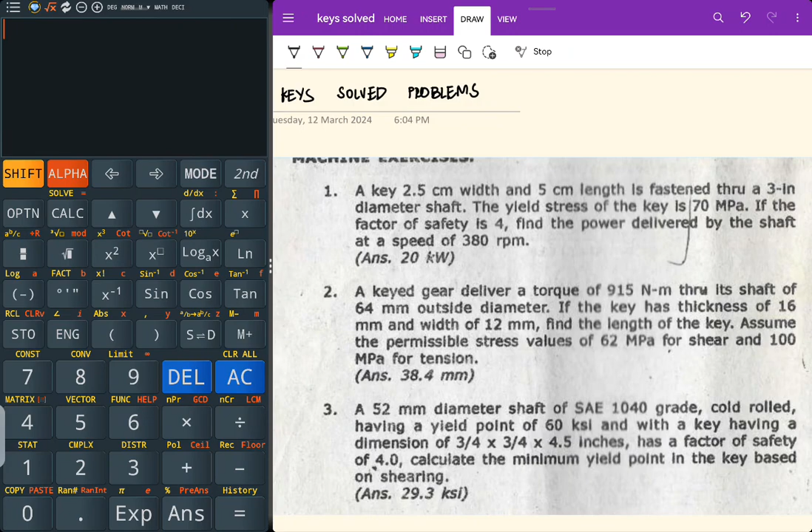Okay, discussion. I put in a part there where it's easier to figure out the compressive strength and shearing stress on the key. But always take note, as I taught, that the torque between the shafting, the key, and the coupling are always equal. So let us go with these three problems.

For problem number 1: a key, 2.5 cm in width and 5 cm in length, is fastened through a 3-inch diameter shaft. The yield stress - when you're given the yield stress of a certain material, there is a standard of the design, which I will include later. But take note, the stress of the design is equal to 0.6 times the yield given to you, divided by the factor of safety. Take note of that, based on the design of keys.

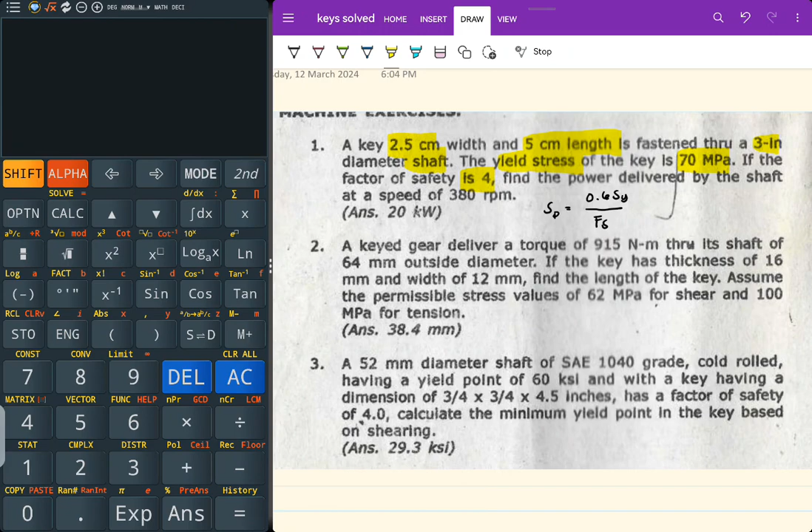Now, when it's said that the key and shaft are of the same material, that means their yield strength is also equal, and the same factor of safety applies to them. So let us continue. You have here a yield stress for the key that is equal to 70 MPa. Now, if the factor of safety given is 4, find the power delivered by the shaft at a speed of 380 RPM. That's basic.

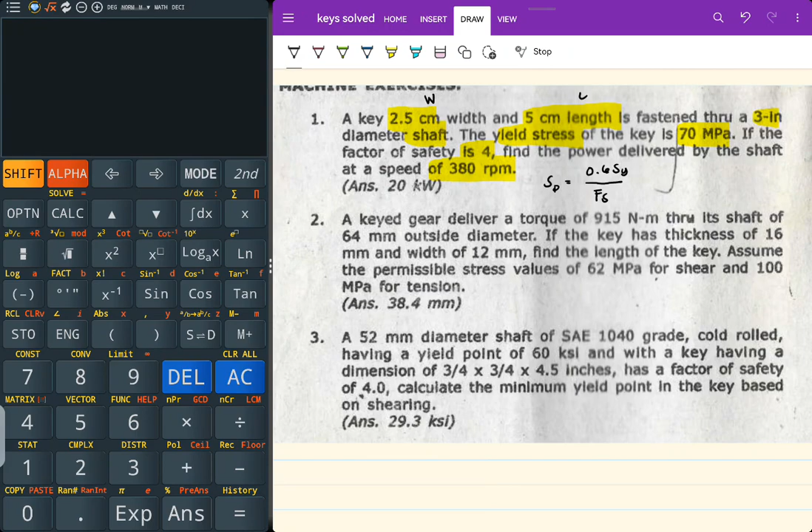What's given to you is the yield stress on the key. So you have the width of the key, which is W, and then the length. Was it said if that is a square key or rectangular key? No, it wasn't given. So let us assume nothing was given. So what do you need to find now? The power on the shaft. Take note, what is the power of the shaft?

Number 1: Power of the shaft is equal to TN divided by your factor. This power, we don't know. We also don't have the torque. We have N. This factor, definitely, we know that.

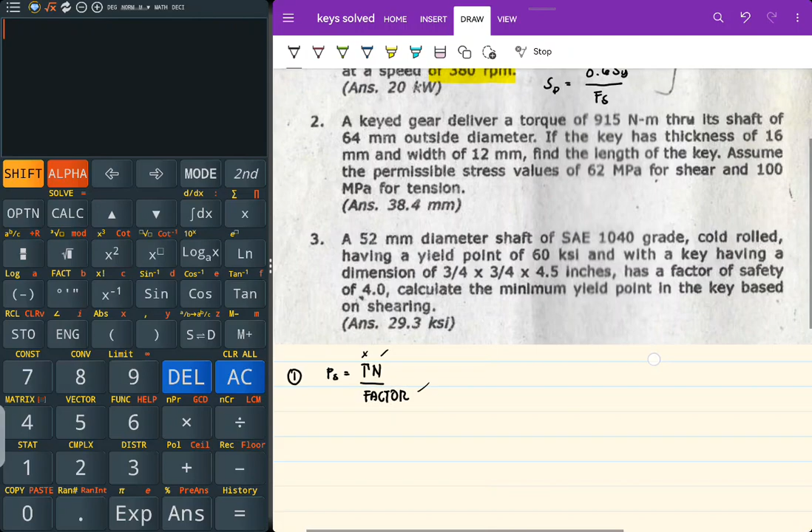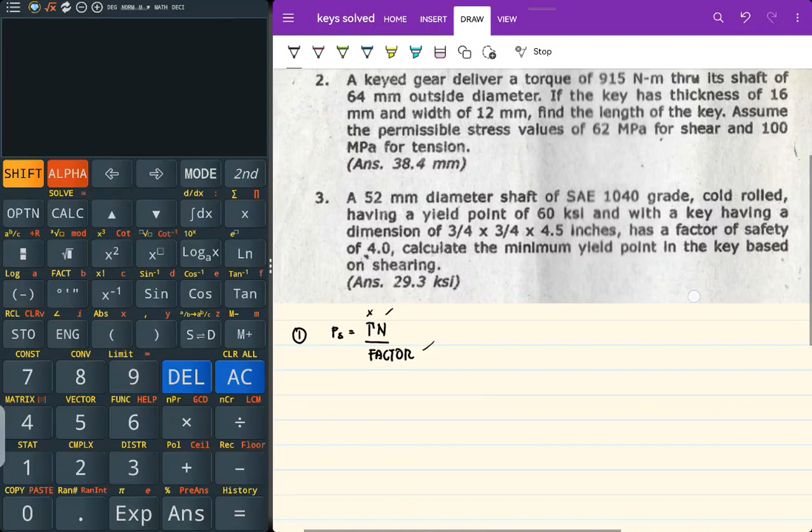We have memorized that. So what we'll do is find the parameters from the 70 MPa yield stress on the key. Sir, what is the design stress of the key based on shearing? I don't remember, sir. Take note that the torque on the shaft is equal to the torque on the key, and that is also equal to the torque transmitted by the coupling. Remember this because our next discussions will be all about couplings.

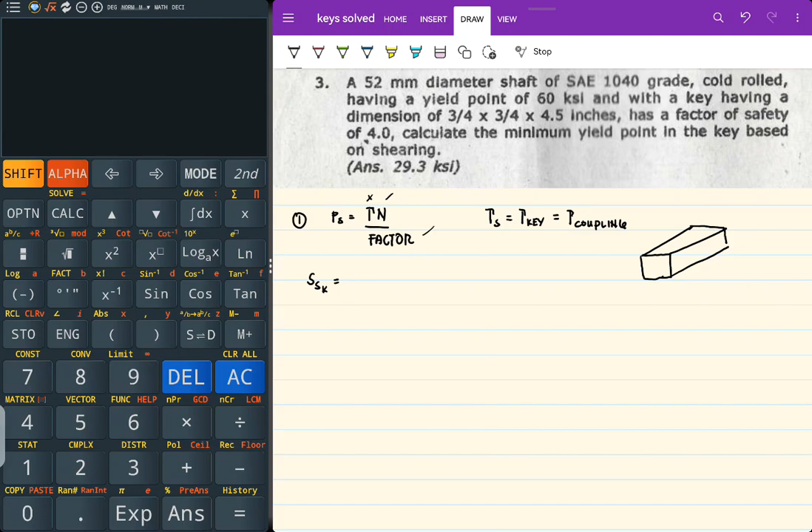If you will see our cross-sectional area, it is this one. This one is the cross-sectional area of the key. This is the shear area. So what do you see there? This is the width and this is the length. So that means force over area.

But we don't know the force, right? Where will we get the force? Remember that torque is equal to force times the radius, that's how the moment or torsion is applied. But when it comes to shafting, diameter is given. So this is equal to force applied times diameter of the shafting, divided by 2.

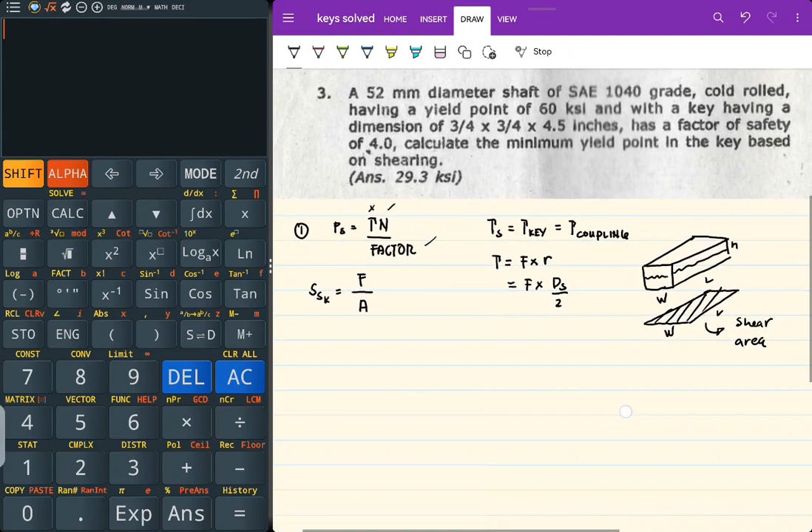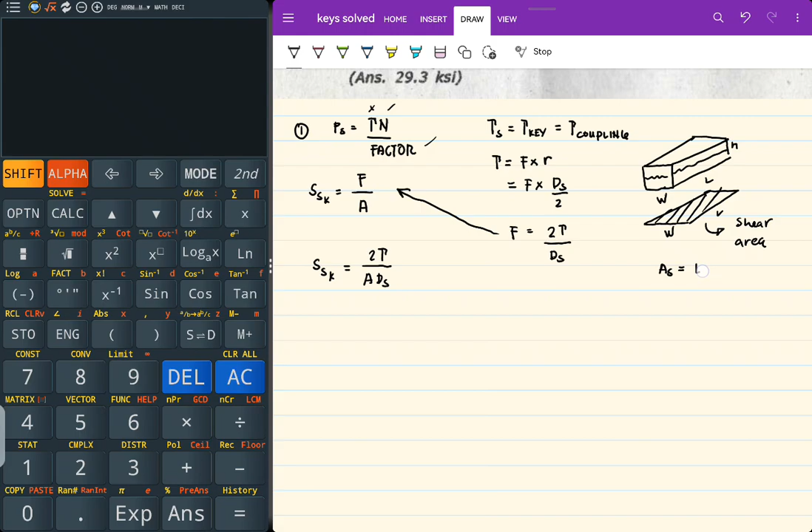Let's reform this - we don't know F. So F will now be equal to 2 times torque divided by diameter of the shaft. So we can substitute this for force if you don't remember it. So therefore, shear stress of the key is equal to 2T over area times diameter of the shaft. And the area now, shear area, is equal to length times width.

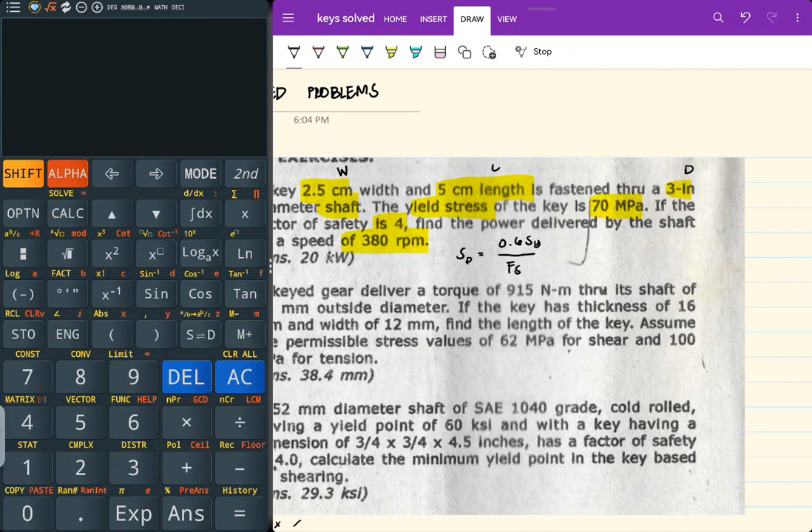But take note, the yield of the key material is given to you. So you have to equate this with what I gave - 0.6 Sy over Fs. So this is 0.6 Sy divided by Fs for the key. So now we have the value of Sy, Fs, Ds, L, W. We just don't have the value of T.

Right? So can we reform it in terms of T? Okay? Right? So the torque there is equal to - let's cross-multiply this. 0.6 Sy, multiply by W, L, DS. Okay, so you won't get confused, put it in parenthesis. Divide by 2 Fs.

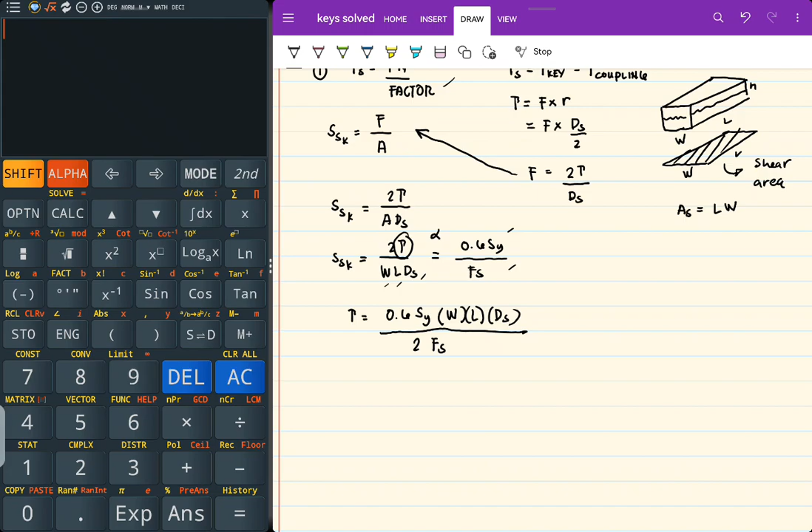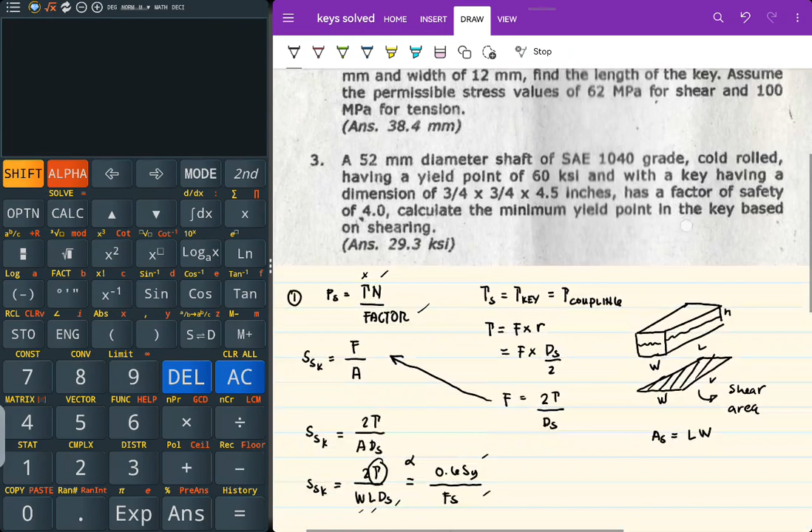But I really want it to already be in terms of power. Remember that power on the shaft is torque times N divided by factor.

Pwede bang itong torque na ito, isaksak ko dito sa torque na ito. So, finalizing our equation, power is equal to torque times 0.6 SY W L DS. Lahat ng nasa taas, i-multiply natin ngayon to ng N. Divide by lahat ng nasa baba: twice factor of safety, tapos yung factor.

So, I now have the working equation for the entire solution. Ipasok na natin lahat ng value dyan. Ano yung SY natin? 70 MPa, or 70 Newton per millimeter squared. W is the width, 2.5 cm, kailangan naka-mm, so multiply ko ng 10. So this is 25 mm na, tapos 50 mm.

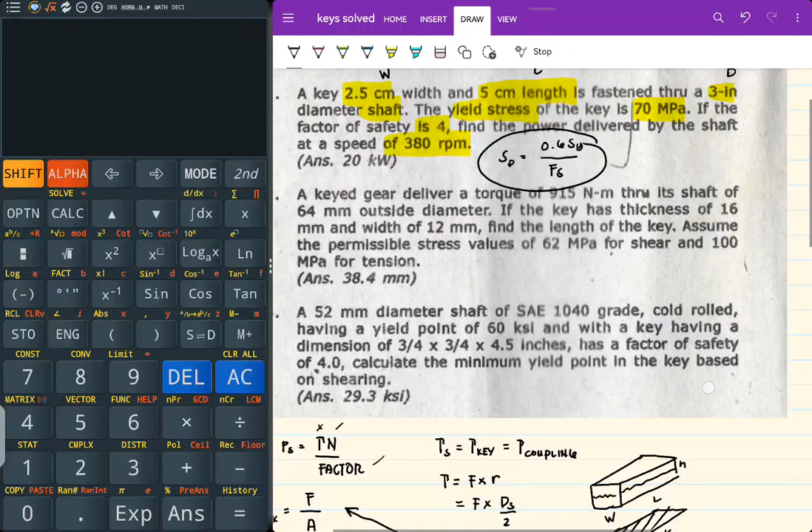Now, 3 inch naman yung shaft diameter. So multiply ko na lang ng 25.4 mm per inch, and then multiply ko ng N. What is your N? 380 RPM. Divided by 2, factor of safety is 4. Hindi ako nagkakamali, ayun, 4. Then multiply to factor: 9549 x 10^3.

Newton, millimeter, RPM, per kilowatts. So calculating the value, cancel muna natin same units: mm squared, mm, Newton Newton, inch inch, mm, RPM RPM. Kilowatts, aakit yung kilowatts dito, eh yun yung natirang unit eh.

So input natin yung value niya sa calculator: 0.6 times 70 times 25 times 50, multiplied to 3 times 25.4 times 380, divide by 2 times 4 times 9549 x 10^3. So the answer is, tignan nga natin kung sakto sa value.

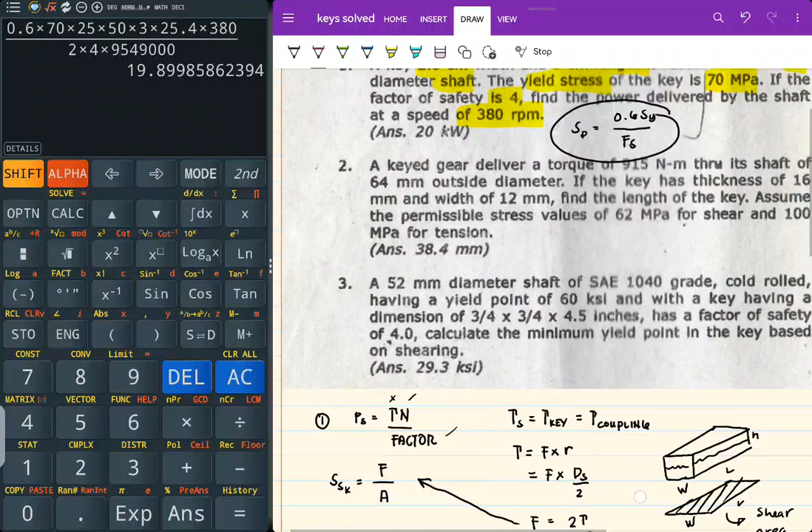Uy, 20 kilowatts, very basic. 19.899 or 19.9, so that is close to 20 kilowatts. So power is equal to 19.8998, approximately 20 kilowatts, basic. Very basic naman yung solving natin. So this is now the answer for that.

So let us go with number 2. Medyo challenging ba yung mga ganitong problem? I think not, kung nag-aaral ka, hindi yan. Okay, so let us go with this problem.

Sign natin: a keyed gear delivered a torque of 915 Newton meters. So given na kagad yung torque, through its shaft of 64 mm outside diameter. Huwag ka munang kabahan kung outside diameter, wala ibibigay dyan na hollow. Pag key, walang hollow shaft, hindi pwedeng butas yung shaft mo, kailangan solid yan. So if the key has a thickness of 16 mm, T,

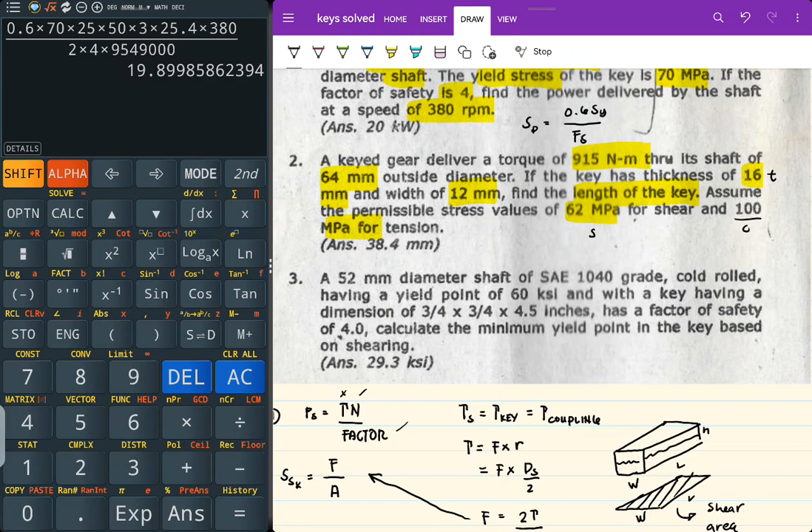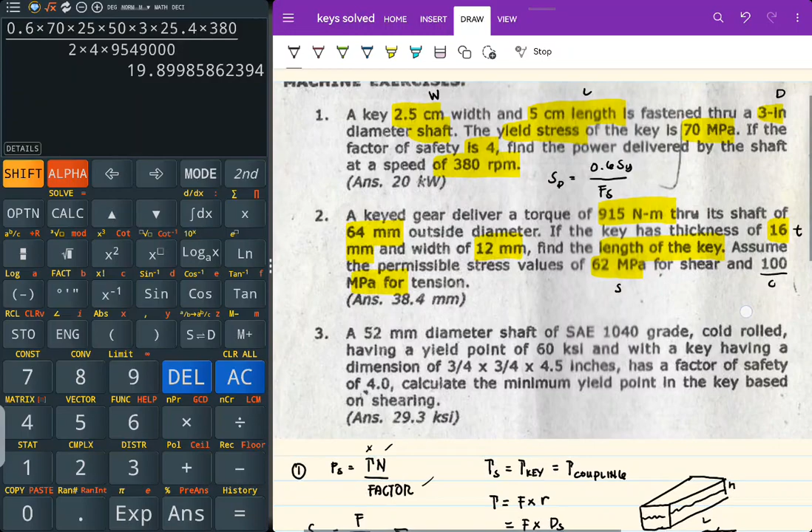at meron kang width na 12 mm, find the length of the key. Assume the permissible stress values of 62 MPa for shear and 100 MPa for tension. So this is for the shear of the key, and this is for the compression on the key. O saan tayo pwedeng makakuha ng length ng key? Doon pa lang sa stress value, pwede na eh. May binigay ba dyan na SY? Wala ka nabasa, so definitely hindi mo gagamitin yung standard of the design na 0.6.

Okay, so number 2. Shear stress on the key. Alam natin the shear stress on the key is based on, balikan natin, yung shear area. So that is 2T, over W L DS. Dalawa sila, kaya wild sila.

So ang hanapin natin is the length of the key, yung L. So reform natin to in terms of L: L is equal to 2T divided by W, DS, and SK. So L is equal to twice of the torque. Ano yung torque natin? 915 Newton meter. Check nga natin kung tama yun.

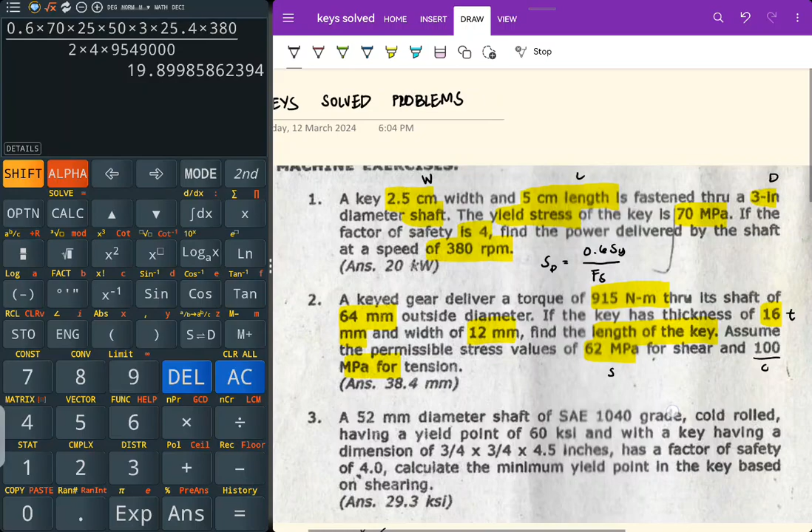Tapos meron kang W, the width of the key is 12. Ayan o, width of the key is 12 mm. Diameter of the shaft is 64 mm. And then yung stress pag shear is 62 MPa.

Newton per millimeter squared. Cancel all same units and then pindutin sa calculator. Mm squared cancel, Newton Newton. Naka-meter to, kailangan ko ay millimeter, so multiply ko ng, millimeter ba? Tama, multiply ko ng 1,000 mm every meters.

So, cancel ulit yung meter, meter. Pindutin ang value, paslak sa calculator. 2 times 915 times 1,000 divided by 12 times 64 times 62. So, the answer is...

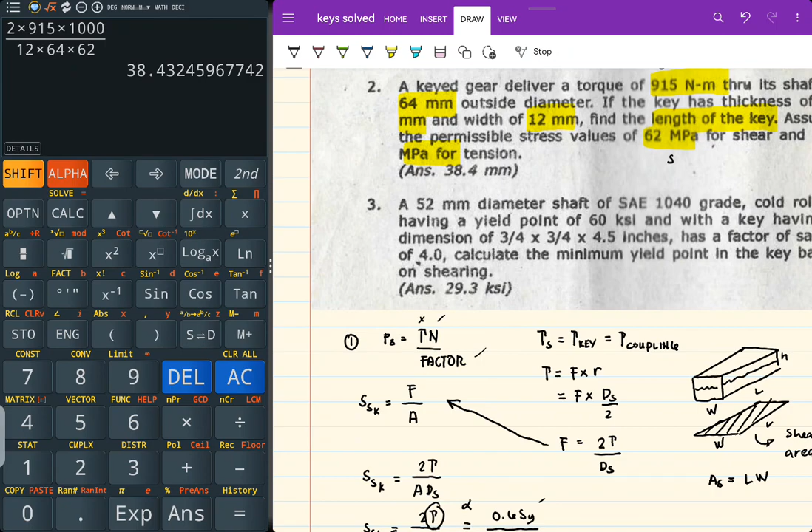38.43 millimeter. Check the value kung sasakto ba. Oy, that is basic. Dali lang ang key pag alam mo yung proper way of solving tsaka yung kanyang equation or the formula. Kung hindi alam ang formula, mag-drawing. Okay? Huwag magkabisado. The next, number 3.

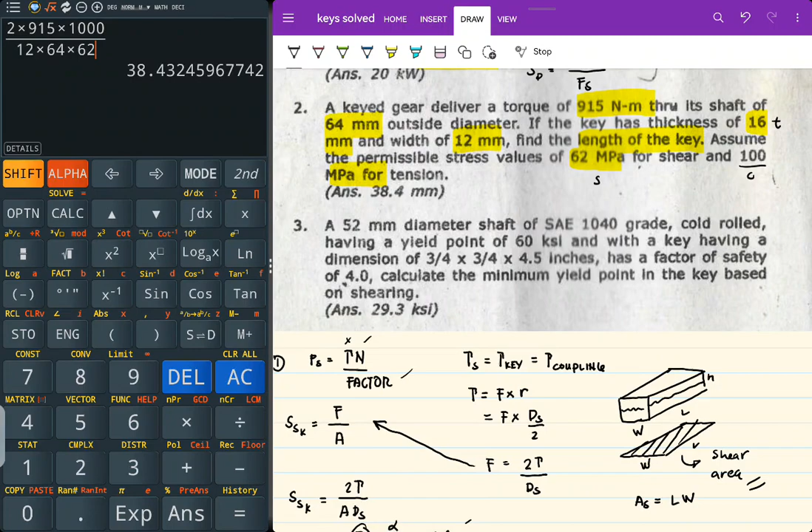For the next number 3, okay, a 52 mm diameter shaft of SAE 1040 grade cold rolled steel. Okay, huwag mo nang pansinin yun, basta mahalaga dyan, binigay niya yung yield point ng shaft ay na 60 KSI. With a key having a dimension of 3/4, 3/4, 4.5 inch. What type of key is this?

Laging huli yung binibigay dyan is length. Okay? Width, thickness. Ito yon. Yung 3/4 is the width, thickness is 3/4, and then length is 4.5. So, pag pareho yung width and thickness, that is a square key. Okay? So, it has a factor of safety na 4.

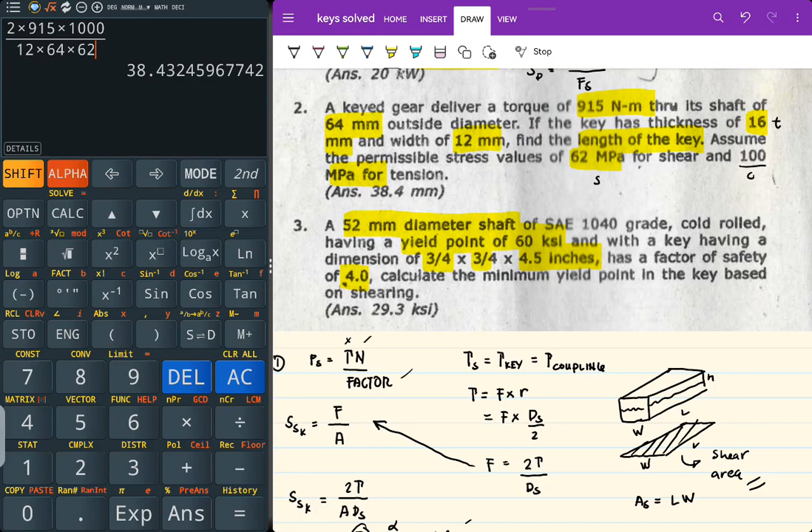So, parehas sila. Calculate the minimum yield point in the key based on shearing. So, the yield point, SY, based on shearing on the key. Ibig sabihin, hindi sila parehas ng material, pero parehas silang dadaan ng design na 0.6 SY divide by factor of safety. Okay? Doon muna tayo sa shafting.

Diba? On the shaft, ano ba yung stress on the shaft? Shear stress on the shaft. Tanda pa ba natin that is 16T over pi diameter of the shaft cube? Tama? Ang problema dyan, binigyan ka ng yield point sa shaft. So, the shearing stress on the shaft is also based on the design, that is equal to 0.6 SY divided by factor of safety.

Correct? So, meron tayong yield point, meron tayong SY, check, meron tayong FS, meron tayong diameter of shaft, wala tayong torque. Okay? So, pwede ko bang i-reform to in terms of the torque? Kasi, remember, yung torque on the shaft is equal to the torque on the key.

Tama ba? So, i-reform ko muna to ng torque based on the shaft. Torque on the shaft is equal to, okay, cross-multiply natin to. 0.6 SY pi diameter of the shaft cube divide by 16 Fs. I have first equation, 1. Huwag ka na muna mag-calculate. Mag-algebra muna tayo. Okay lang.

So, equation 1 tayo. So, dito naman tayo pupunta sa key. Okay? The shear stress on the key. Ayun ang hinahanap natin eh. So, calculate the minimum yield point on the key based on shearing. So, stress nga ng key, shear nga lang. So, this is 2T over WLDS.

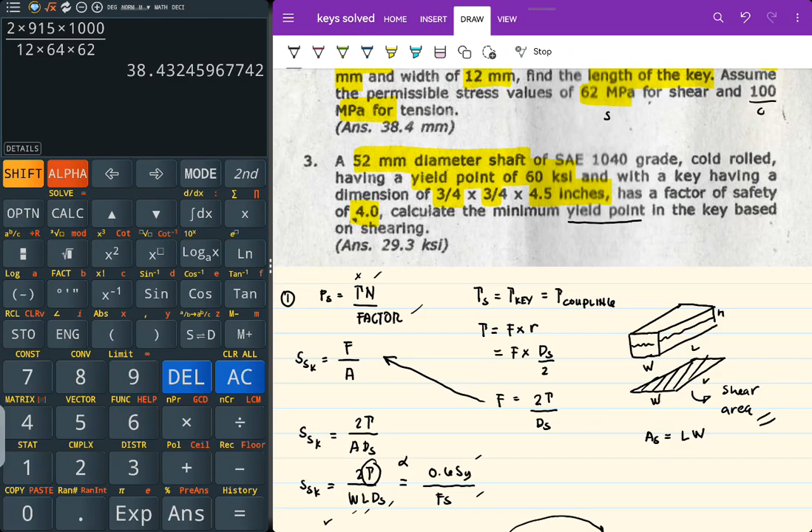Okay? But, take note of this, binigyan ka ng minimum yield point. Ang hinahanap sa'yo dito is yield point, ha? Hindi yung shearing stress. Okay? Take note, yield point. SY on the key. So, this will be equal to 0.6 based on design standard, yield point, SY on the key, divided by

WLDS. Okay. So, in terms of torque ulit ako, pwede ba? Hanapin ko naman siya, yung torque on the key. The torque on the key, cross-multiply natin to, is equal to 0.6 SYK, okay, multiply to WLDS, divide by, okay, mali pala ako nalagay dito, factor of safety dapat to. So, this is 2Fs.

This is equation 2. Di ba sabi natin that equal yung sa key and then sa shaft? Torque nila? Pwede bang i-algebra ko na lang yung dalawang yan? Okay, equate ko silang dalawa. So, key muna tayo. 0.6 SYK, okay, WLDS, divide by 2 factor of safety.

Equal to, ito namang isa sa taas, this one, equation 1. So, 0.6 SY on the shaft, okay, pi diameter ng shaft cube, divided by 16 Fs. Pwede bang simplify ko sila? May mga cancel ako. Cancel natin lahat ng same units.

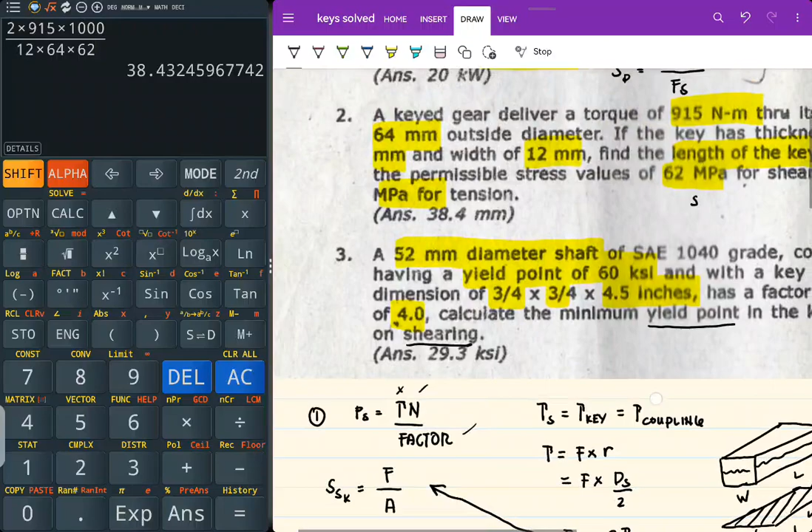Pi times diameter of the shaft given. Diameter of the shaft is 52 mm. So, 52 mm, multiply natin ng 1 inch every 25.4 mm, squared. Divided by W and L. W natin is, I think, 3/4 inch. Yung length natin is 4.5 inch.

Times 8. Cancel all same units. Yung inch squared dito sa taas, mm, yung inch sa baba. Ang natira is KSI na lamang. So, calculate all the values.

Makita natin yung sagot, 60 pi times 52 divided by 25.4, okay, naka-square to dapat, squared. Divide by 0.75 - bakit, sir? 3/4 eh. Times 4.5 times 8. So, the value is 29.3, 29.26 KSI. Very basic. Okay?